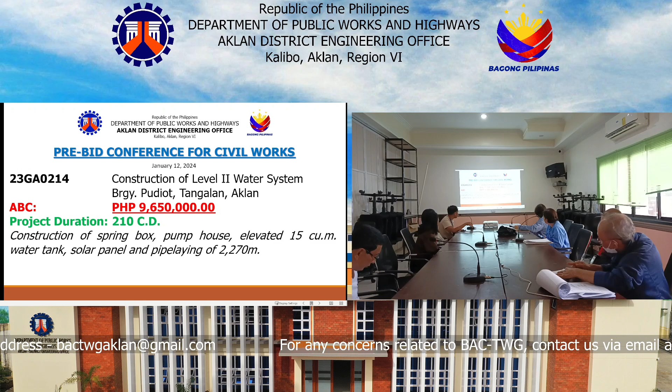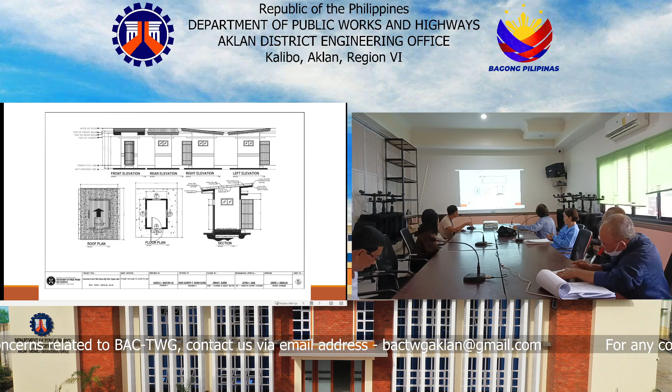Good morning, everyone. For project 23GA0214, construction of level 2 water system, Barangay Pudiot, Tangalan, Aklan, with an ABC of 9,650,000. Project duration is 210 calendar days. Scope includes construction of spring box, pump house, elevated 15 cubic meter water tank, solar panel, and pipe laying of 2,270 meters. The screen shows the location map, the site elevations, the sections, the tank fitting details, and tank perspective plan.

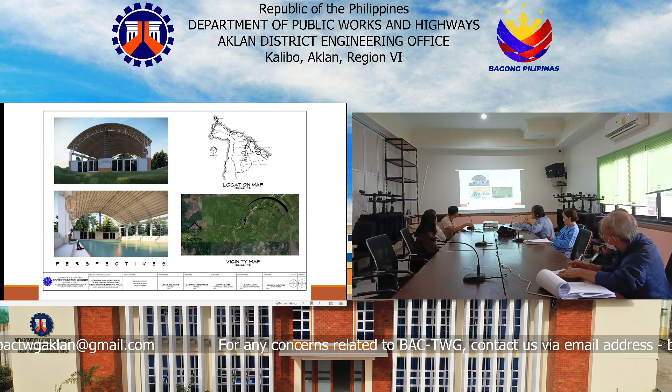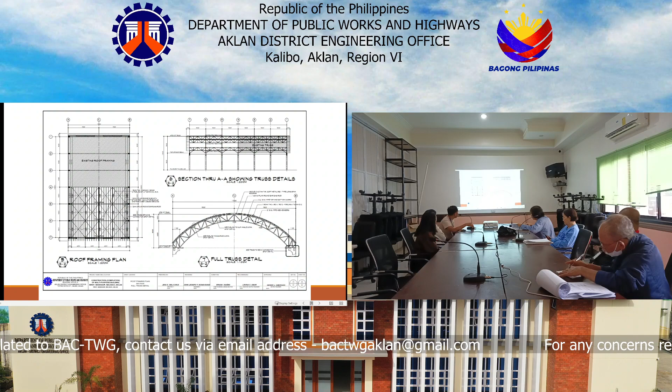For project 24GA0066, construction completion of multipurpose building, Barangay Manhanip, Malinao, Aklan, with an ABC of 1,980,000. Project duration is 90 calendar days. Scope is construction completion of the multipurpose building, continuation of 3 units of full trusses with center, middle, and side struts, 328.11 square meters of pre-painted metal sheet complete with metal flashings and side gutters, painted finish, 14 units of columns supporting the front covered walls, 2 units of steel gates, and 6 units of steel windows. The screen shows the perspective, location map, floor plan, roof plan, elevations, roof framing plan, and full truss details.

For project 24GA0117, construction completion of multipurpose building, covered court, Polo Elementary School, Barangay Polo, Banga, Aklan, with an ABC of 2,970,000. Project duration is 120 calendar days. Scope of works includes installation of one span of roofing equivalent to 489.8 square meters of pre-painted metal sheets, rib-type long span with 2 units of full truss, 2 units of central strut beam, 12 units of middle strut beam, and 12 units of side strut beam with gutter, flashing and downspout, plus additional electrical works for lighting.

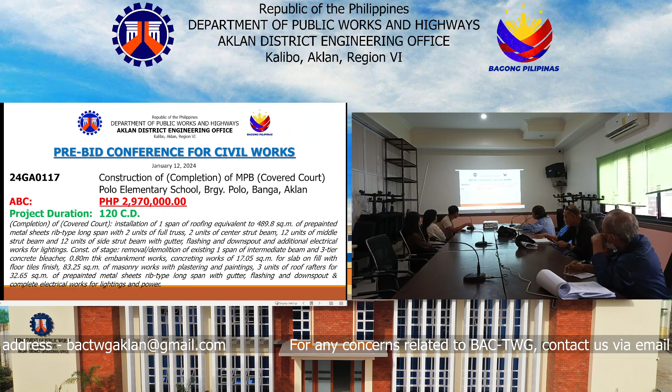Works also include construction of a stage, removal and demolition of the existing one span of intermediate beam, and a 3-tier concrete bleacher with 0.80 meter thick embankment works, concreting works of 17.05 square meters for slab on fill with floor tile finish, 83.25 square meters of masonry works with plastering and painting, 3 units of roof rafters for 32.65 square meters of pre-painted metal sheets rib type long span with gutter, flashing and downspout, and complete electrical works for lighting and power. The screen shows the perspective, location map, floor plans, elevations, roof framing plan, and other details.

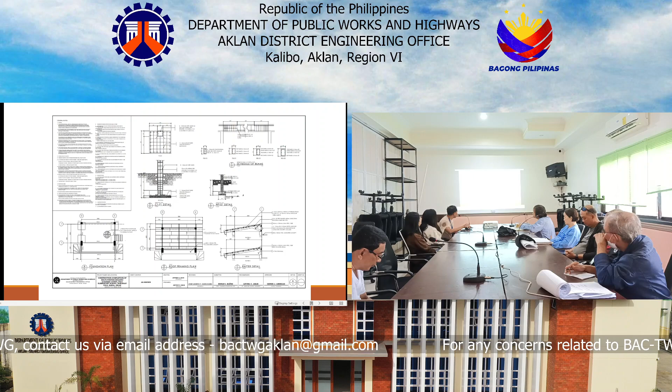Good morning. For project 24GA0063, construction completion of multipurpose building, Barangay Lanipga, Tangalan, Aklan, with an ABC of 1,980,000. Project duration is 90 calendar days. Scope of works includes construction of 7 units of roofing and column, tie beam, intermediate beam, roof beam, wall footing, 110.16 square meters of 4-inch CHB wall, and 2 units of 2- and 3-tier concrete bleachers respectively.

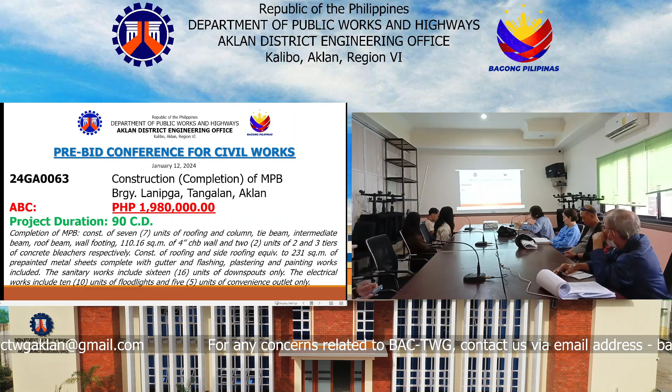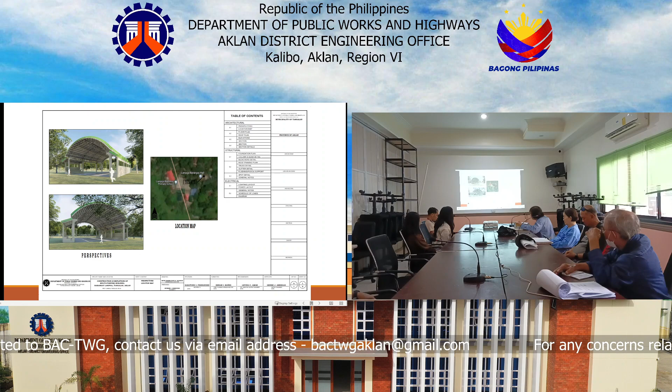Construction of roofing and side roofing equivalent to 231 square meters of pre-painted metal sheets complete with gutter and flashing, plastering and painting works included. Sanitary works include 16 units of downspouts only. Electrical works include 10 units of floodlights and 5 units of convenience outlets only. Shown on screen is the perspective and location map, the floor plan and roof plan, the elevation sections, and section details.

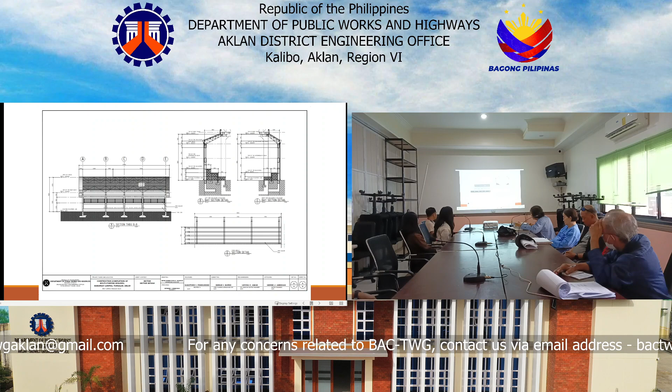For the project 24GA0085, construction completion of multipurpose building, Kinalangay, Viejo, Malinao, Aklan, with ABC of 1,980,000. Project duration 90 calendar days.

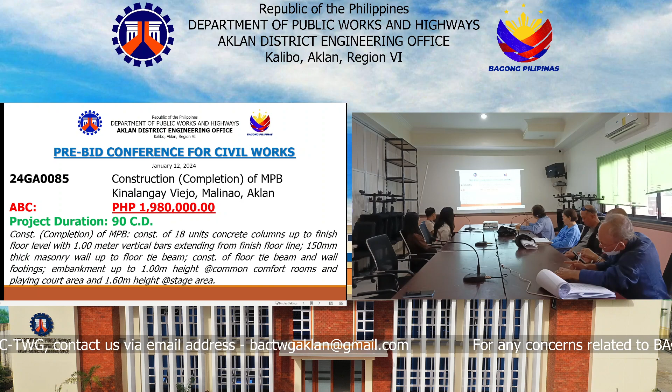Scope of works include construction of 18 units concrete columns up to finished floor level with 1 meter vertical bars extending from finished floor line, 150 millimeters thick masonry wall up to floor tie beam, construction of floor tie beam and wall footings, embankment up to 1 meter height at common comfort rooms and playing court area, and 1.60 meters height at stage area. Shown on screen are perspectives, location map, and vicinity map.

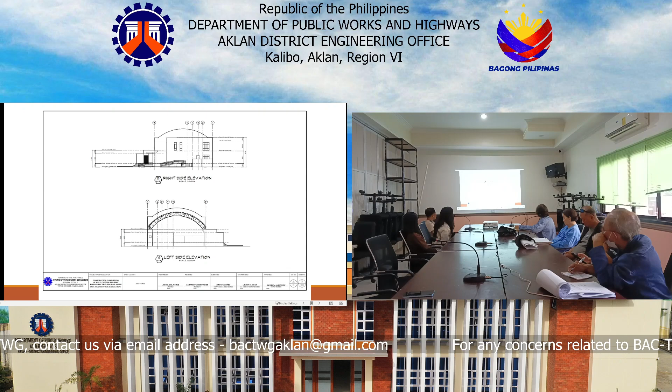The ground floor plan, second floor plan, the elevations, sections, foundation plans.

For the project 24GA0138, construction, concreting of Barangay Road, Barangay Poblacion to Sitio Taghangin, Barangay Poblacion, Libacao, Aklan, with ABC of 4,950,000. Project duration 65 calendar days.

Scope of works include construction of road, includes concreting and removal of PCCP, construction of slope protection and cross drainage, total length of 0.7 lane kilometers, 4 meters width of PCCP, shoulder width of 1 meter.

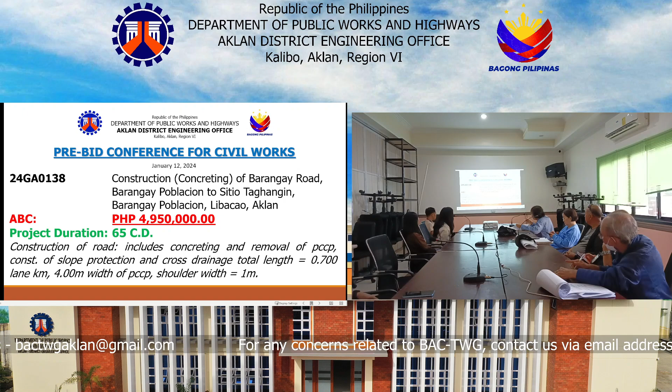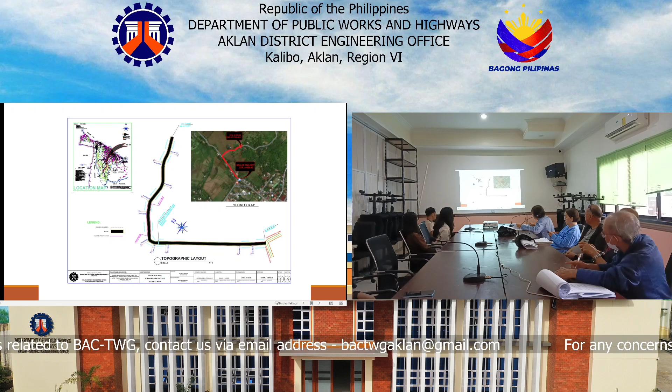Shown on screen are location map, topographic layout, and vicinity map. The detailed plan of PCCP, the typical road section A and typical road section B.

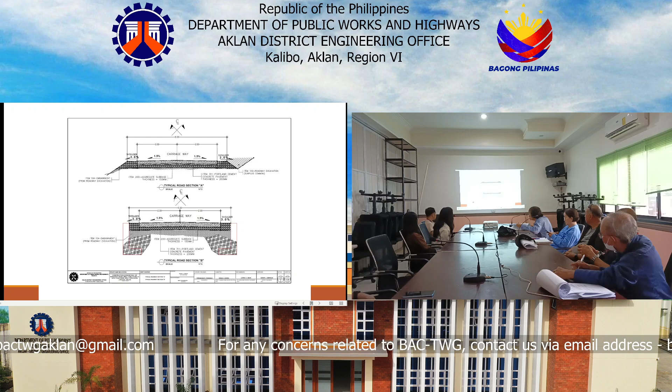Good morning, everyone. For Project 24GA0141, construction of MPB in Libacao, Aklan, with ABC of 4,999,500. Scope of work are in Barangay Poblacion, Libacao, Aklan, construction of 12 units of column and footing, 10 units of roof beam.

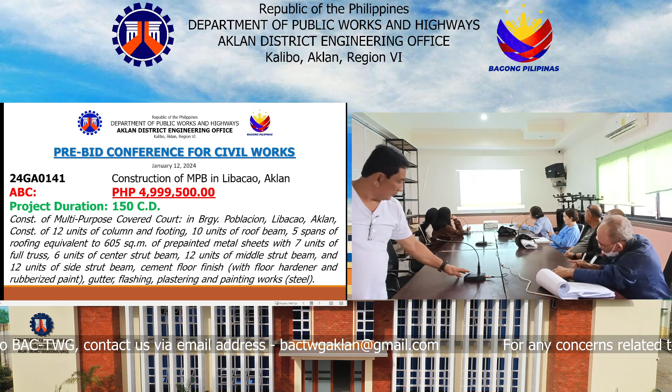5 spans of roofing equivalent to 605 square meter of pre-painted metal sheets with 7 units of full truss, 6 units of center strut beam, 12 units of middle strut beam, and 12 units of side strut beam. Cement floor finish with floor hardener and rubberized paint, gutter, flashing, plastering, and painting works.

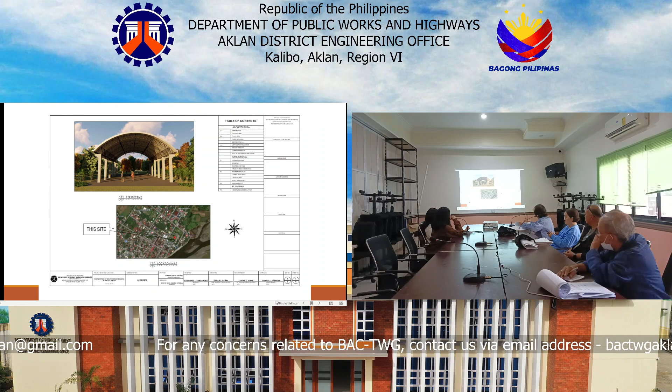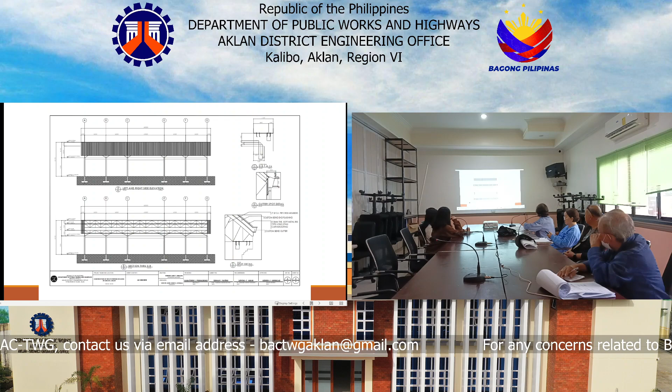On screen, show the perspective and location map, the floor plan and front elevation, left and right elevation, and section 2, foundation plan, and column footing detail.

For Project 24GA0145, construction completion of MPB, Sitio Agbatuan, Barangay Oyang, Libacao, Aklan, with ABC of 2,970,000. Scope of work are construction of 5 spans of roofing equivalent to 594 square meter of pre-painted metal sheets.

With 6 units of full truss, 5 units of center strut beam, 10 units of middle strut beam, and 10 units of side strut beam. Cement floor finish with floor hardener and rubberized paint, and painting works for steel.

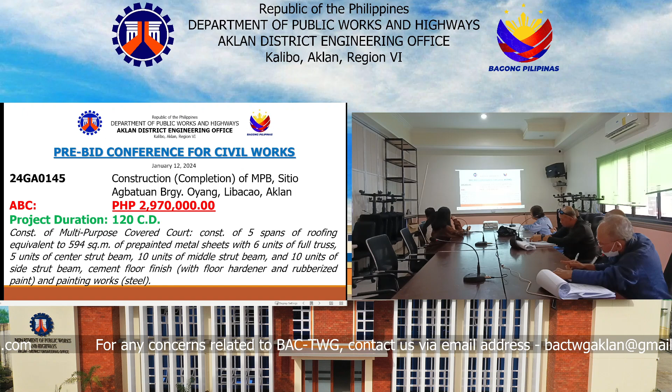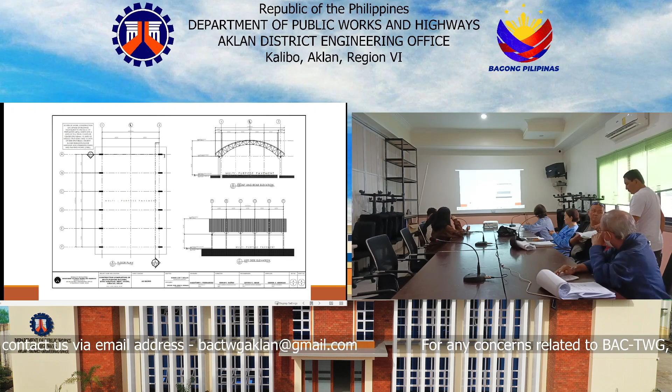On screen, show the perspective and location map, the floor plan, multi-purpose front elevation and left side elevation, the roof framing plan, and the truss details.

For Project 24GA0160, Jaime Cardinal Sin Avenue, K0293 to K0294, 332.45, with ABC of 22,366,956.50.

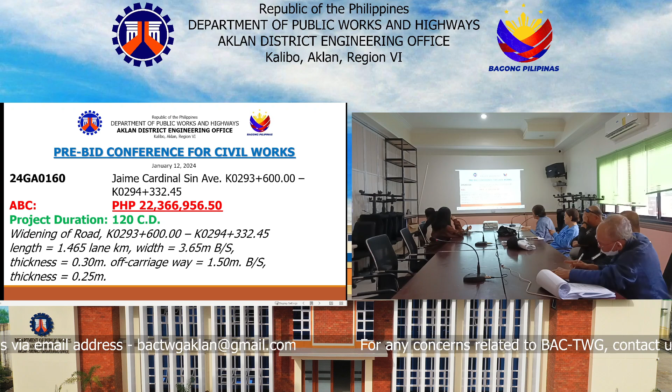Scope of work, widening of road, K0293 600 to K0294 332.45, with a length of 1.465 lane kilometer, width of 3.65 meter B over S, thickness of 0.30 meter, off-carriageway of 1.50 meter B over S, and thickness of 0.25 meter.

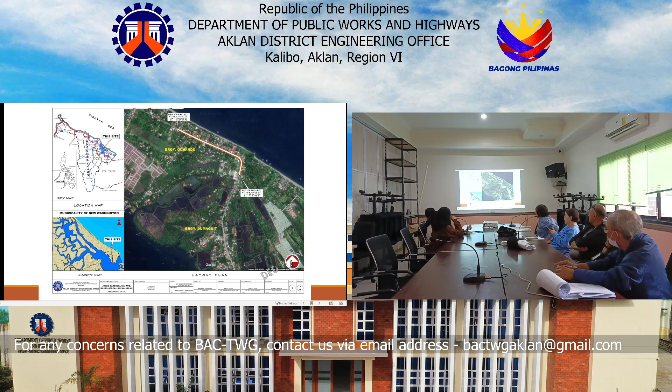On screen, show the location map, vicinity map, and layout plan. Summary of quantities. The typical road section 1 and 2.

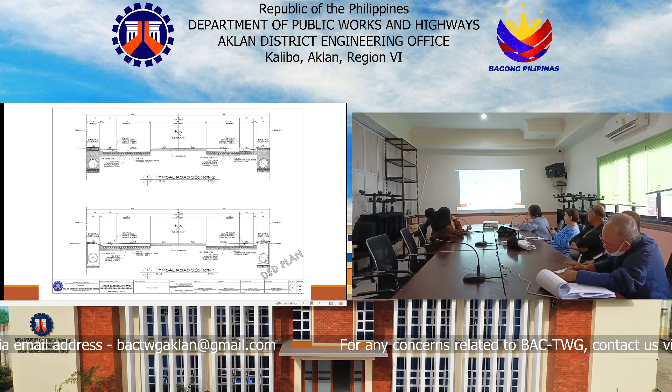Please inform the deadline of the submission of bids will be on or before 10 a.m. of January 25, 2024. Opening of bids will be on the same day immediately after the deadline of submission of bids.

Prospective bidders should be registered with and classified in the Philippine Contractors Accreditation Board with PCAB license category of C and D for small B.

Only the following documents are required from prospective bidders prior the sale of bidding documents: Company ID or any government issued ID, authorization letter, special power of attorney for sole proprietorship, or board resolution, partnership, joint venture resolution.